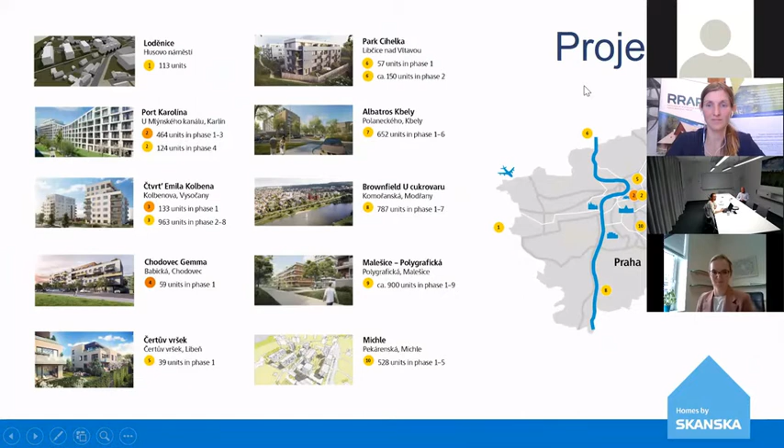But I will not go into detail for you because it's detail connected with Prague. But you can see maybe a little bit, you can get the feeling of the buildings on the left, how the buildings look.

So coming to the end of the introduction, and what is, I believe, important for this presentation, it's our values. It's also explaining why we are doing such a Greywater solution for flushing. It's because we care for life, and we focus on the customer. In Czech Republic, water is quite an issue, especially in recent years, so we believe those solutions, saving water, are good for our customers and good for nature. So it's explaining the first and fourth value.

And after this short introduction, I will go to this project. Our presentation, or our speech, consists of a presentation of mine introducing the environmental agenda, so the water, why we work with water, and also sharing with you a very interesting survey for us that we had done last year.

After this, why we work with water, Petr will focus on project Botanica K and go into detail. At the end, as a third thing, we have prepared for you a video, about 6 minutes long, for you to make the visit, to see the system, to see the project in reality.

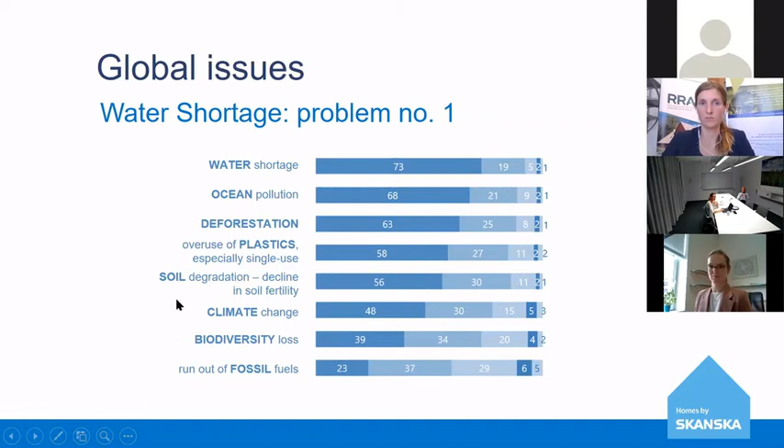We asked which environmental issues are important for them, and we can see that water shortage is about the most important. From the global perspective, water was the top issue, with climate somewhere quite below, along with biodiversity and other issues. When we asked about personal relevance, water remained first, but climate was second.

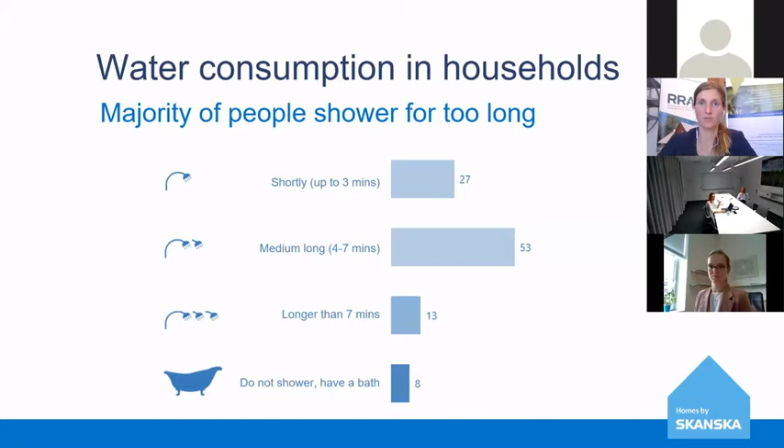We also asked people about their habits at home, just to give you a feeling about some detailed information - for example, how long a shower they take, because we realized that the water used for hygiene, for showering, is a very big amount. So we focus on decreasing the flow, the amount of water, and this is making a big impact on the consumed amount of water.

When we asked people what their motivation is to save water, because it's also important for us, we found that in the Czech Republic, money is still king - they want to save money, half of the people. But we can see it's also becoming a bigger issue that they want to solve environmental and global issues.

When we wanted to understand how we can help our clients save water, we asked them if they save water, and if not, what would motivate them. You can see that the largest amount of people would like to save water, but they don't know how. So you can see there is space for us, as developers, as investors, in how well we prepare the building, so that people can use it in a good way. We need to prepare it, explain it, and make it comfortable for people.

So we know if they want to save water, and we also asked again why they want to save water. We can see that in this survey happening last year, money and global issues are quite close. Petr will present a survey from 2015, when we gave the Botanica K project to the market, and the answers were different - you can see the change in mindset over 4 years, because we're dealing with this topic a lot. We work with the Ministry of Environment, we are changing legislation, and we do a lot of education, not only for clients but for all the public.

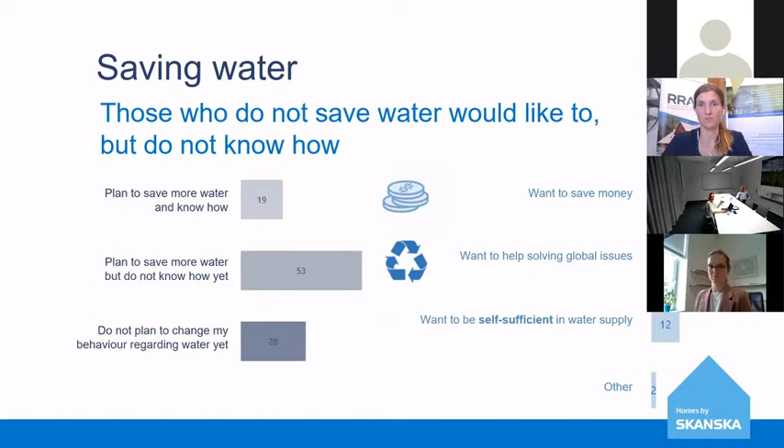You can see that 12% would like to be self-sufficient in how they save water. Dual flushing is the winner, but you can see in the middle that flushing with non-drinking water is becoming a topic - 12% of respondents could imagine using the system we are offering.

Coming close to the end of my part, it's important to understand household consumption so you understand why we focus on greywater flushing. Here you can see the cake figure showing consumption. Personal hygiene, together with showers, makes up the bigger portion, and we are aware of it. Of course we need to let people keep clean, but we can achieve that activity with a lower amount of water. So what we're doing is using less water, but you can see that water amount is 25%.

We are using drinking water quality, the highest quality of water, which is quite expensive, so we can use a lower quality of water instead. This part of the case was interesting for us, and we decided some years ago in this team - I'm happy to have Peter here with us, as he is the senior manager dealing with these topics.

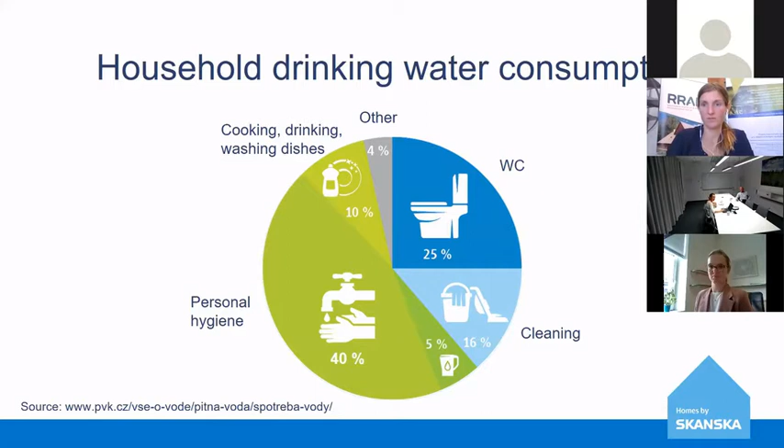So this is the motivation to understand the consumption. I have two last slides before I give the word to Peter. Now I'm moving from the motivation, from the Skanska reality, to the locality in Prague, in the district called Botanica, and its last phase called Botanica K.

What is special about this project? It's especially important for us that it was the first residential multi-story building in the Czech Republic flushing with greywater, and it's also the first residential building in the Czech Republic using the BREEAM sustainability certification.

This is helping us move towards higher sustainability of our projects, and it's third-party verification. Maybe you know LEED, maybe you know BREEAM, maybe you know some other local certification, but it's quite a challenge.

We have a lot of solutions that I will show in the next slide, but we also had a special focus on public spaces.

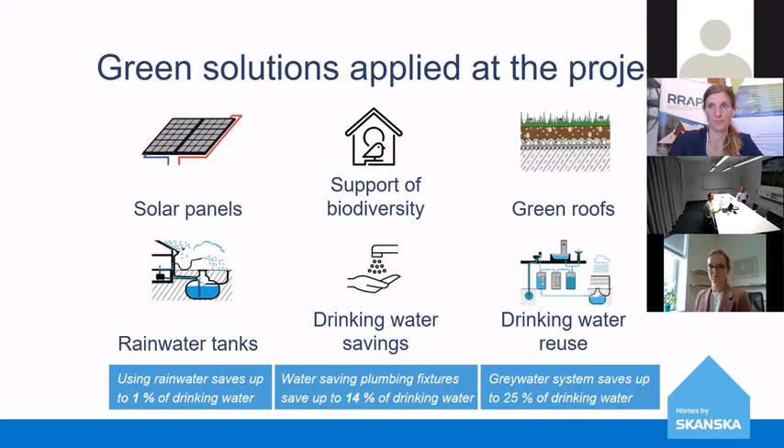My last slide is to inform you not only about the greywater solution, but you can see that we are also saving drinking water with low flow fixtures.

We are using rainwater tanks, underground tanks for watering the greenery, both public and private.

We are using green roofs - not all roofs are green, but let's say almost half, or a third. We support biodiversity, and we are preheating the hot water with solar panels.

We do a lot of small things, but let's focus on the picture in the lower right, showing how we are saving drinking water on the activity of flushing the toilet. I'm happy that Peter will take over.

Peter will explain and go much more into detail. Peter, please continue. Thank you, Eva.

I was more happy that you were talking - I could be quiet, it's fine.

Thank you very much for the introduction, and thank you all for having such an interest in our solution, in our projects, and in our country.

It's fine, my name is Peter. Excuse me, Peter, sorry, I cannot hear you very well - can you maybe go a little bit closer to the microphone? Peter, maybe if you can sit here. Let's try, please. Thank you for the feedback, now it's good, it's much better.

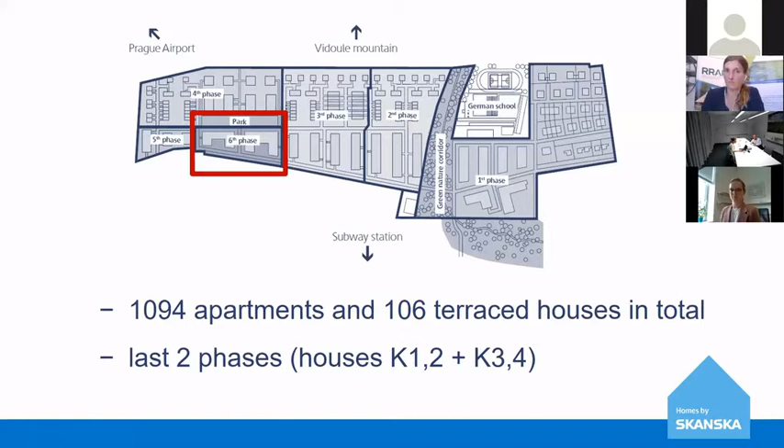In the red box - I wanted to say circle, red circle, I'm usually using circles - is the last phase, which originally should have been constructed as commercial buildings.

However, we turned it into residential development because of the demand in the area, and we started this development around 2009-10. At that time we decided that we should move higher in our sustainability solutions - this was the big original thinking that led us toward the greywater management system and so on.

Those buildings, as you can see, there are two houses - maybe in this picture it seems there are four, but actually it's just two towers that are one building. We can call them K12 and K34.

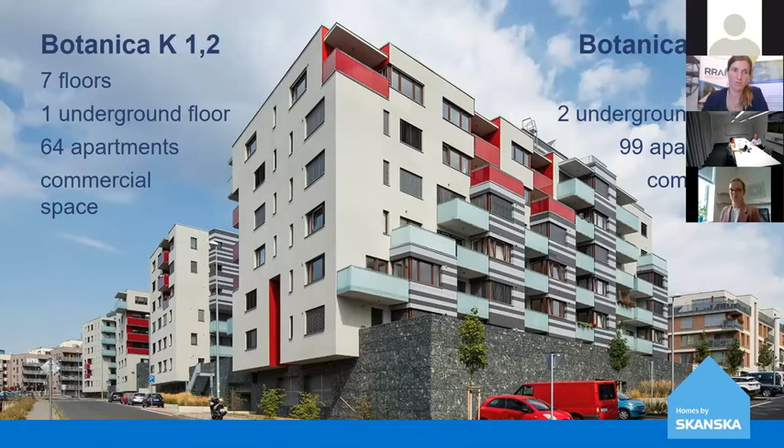The bigger one is K34. It has almost 100 apartments, 2 underground floors, 7 upper floors, and some commercial spaces, which are used for small shops. And the Botanica K1, which contains, both buildings contain the same system, and you will see the video from K1 too. It also has 7 floors, 1 underground floor, 64 apartments, and some commercial spaces. There is a small restaurant and grocery shop.

So once we started to think about it, the first thing we had to consider was the design phase. And Eva slightly mentioned that we started with a survey. The survey was somewhere around 2014, 15.

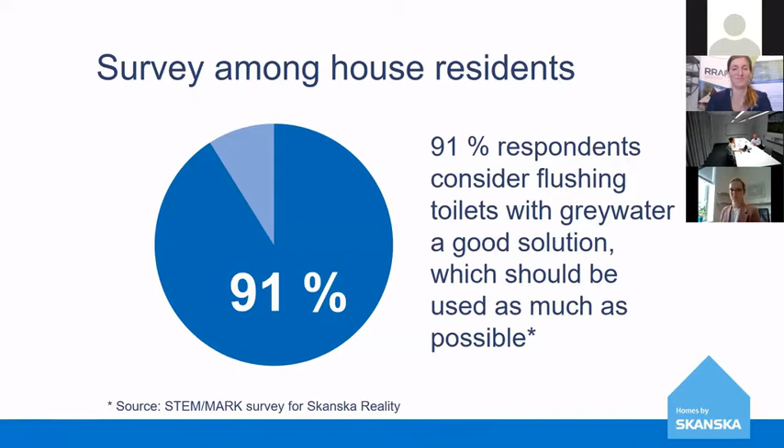90% of respondents considered that flushing toilet with greywater is quite a good solution. However, they probably didn't know all those aspects. Still, they considered it a very good solution.

Those same people also answered that the greywater could be used for car washing, watering flowers, house cleaning, and one brave person said he would be able to drink it, representing 1%, which is also possible. However, we are not so far.

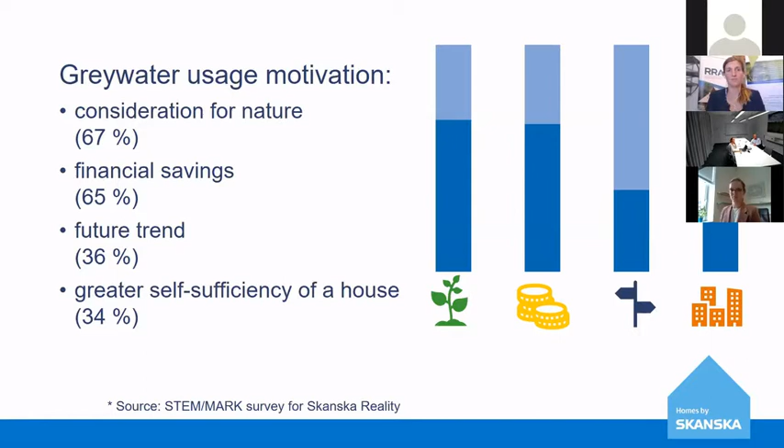So once we started to work with designers and experts, no one had any experience, because we were the first to try to use this system in complex residential buildings like this, and commercial buildings also didn't have any experience with that. There was no legislation, so we tried to pick up all the things that would be possible to find during this kind of development. We tried to calculate cost. We tried to identify possible issues, which was no legislation.

We tried to find some experienced engineers. Finally, we did - we found, I think, the right technical solution. You have to have double sewer lines, separate lines for greywater, a technical room that has to be very well placed in the building. We have to solve the connection to the sewer, including bypasses.

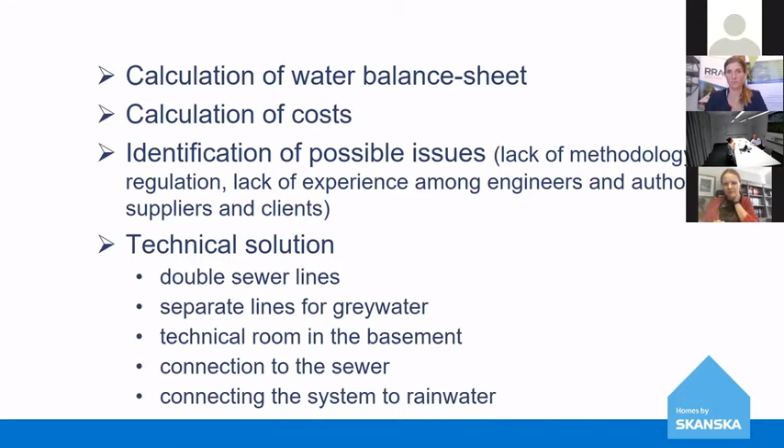And also at the beginning, we tried to connect the system also for the rainwater, because we didn't have any experience. I will talk more about that later on with the connection for the rainwater.

After that, once we did those technical drawings, we went into the process of permitting and realization. The permitting process was finally done. We had the building permit, so we put all that information about the system into the early stages of documentation. And during the realization, we did all the things that were formally planned, the two-line systems.

We also found a very good partner for the technology, like a cleaning technology supplier, which Mr. Petru is with us today. For them, it was also the first realization, and I think we had very good support from them during the installing of the system and monitoring and after-use of the system.

So we also did complex system tests during the realization before we handed over to clients. We invented some kind of measuring together with the hygiene station, with the authorities, etc.

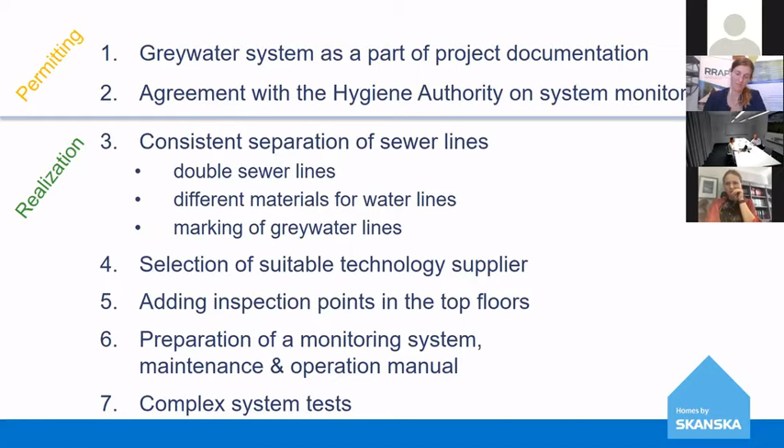It's not working, right? Okay.

And finally, we handed over to the clients, and we also did small things like this picture - what can you see on the screen? We put on the wall in the first basement of the building, just to remind the people that they have this extraordinary system in the building, just for them to enjoy the exclusivity of the building, just to know.

And we also put some kind of educational systems into the building, a screen where they can see the consumption of the greywater and drinking water. It will be on the video as well, so you will see the screen, you will see also this drawing, so we will come back to it.

Before we hand it over to the clients, we try to educate them. We created special documentation for them on how to behave in the building because of this kind of system. We put small signs on the toilets saying it's non-drinking water, and such small things were very good for education. We also properly monitored the system, not only for quantity but also quality, working with our chemical university colleagues who helped us optimize the system during use. Based on that data, we held several conferences to educate hygiene and technical people, and we pushed towards legislation, because at that time there was no legislation for this in our country, so we were quite a pioneer system.

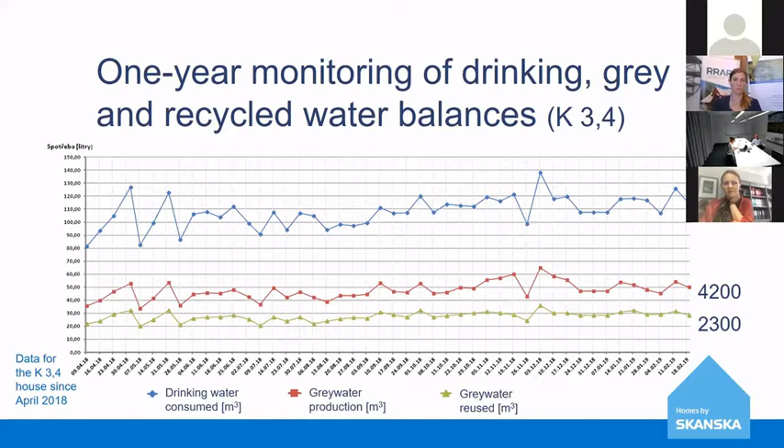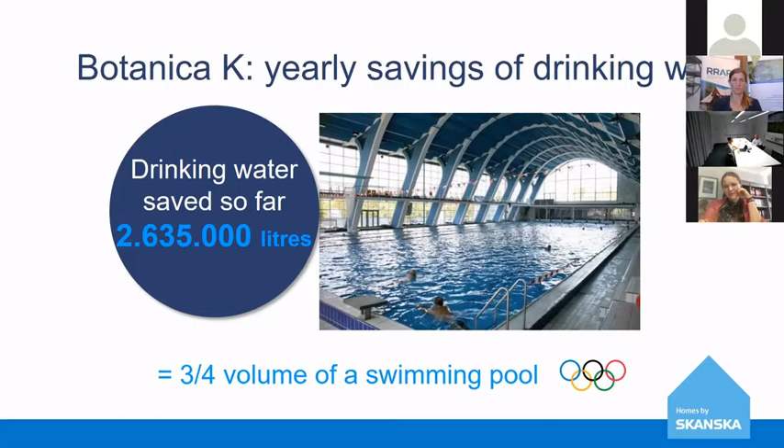This picture is probably our Olympic swimming pool in Prague. I show this often because it's important for people to understand how much, or how many liters, are saved. These are old numbers from 2018 or 2019, and currently we are at 5 - more than 5 million liters of drinking water saved in 2 buildings, which equals 2 of those Olympic swimming stadiums, as you can see in the picture. That's an incredible number. Within 3 years, we saved the equivalent of 2 swimming pools of drinking water.

And that's one part. If we add all those small savings, as Eva explained before - like plumbing, dual-flushing toilets combining 2 and 4 liters for flushing, and also rainwater usage - we are saving 40%, which is also proved by measuring. It's not some commercial number, it's proved by measuring.

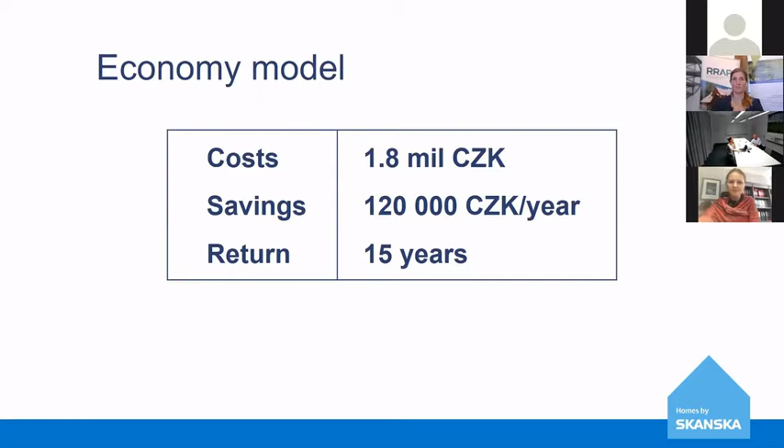People also ask about costing and payback. What you can see here is a very rough number, I would say conservative, because it also depends on how the building behaves. For your imagination, it's somewhere between 10 and 15 years. If the behavior is as good as possible, it could be 10 to 12 years. If the model is conservative, it's 15 years. However, I always show this with the comment that money shouldn't be the driver for this - sustainability is more important.

And the last summary: the system has been very stable and functional for 3 years without any technical problems. We are preparing new projects, and now we are also thinking about using other areas, because we have enough water for uses like cleaning and washing machines. That's our next plan.

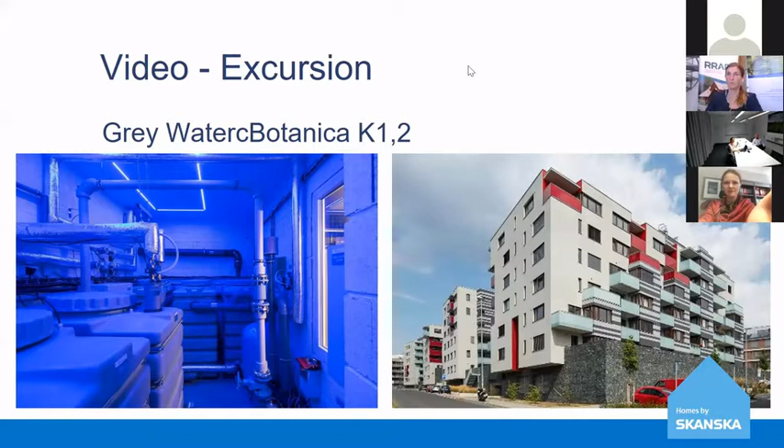Lucia, please, when the video starts, tell me if you can hear us. Yes, no problem. I think it's good, can you see the new screen now? Yes, we can see it. I will play it just shortly. We can see it, but maybe you can make it a little louder. Loud it, okay, yeah, because it was really quiet. Then I will shout at you from the video. So let's start it again. Thank you.

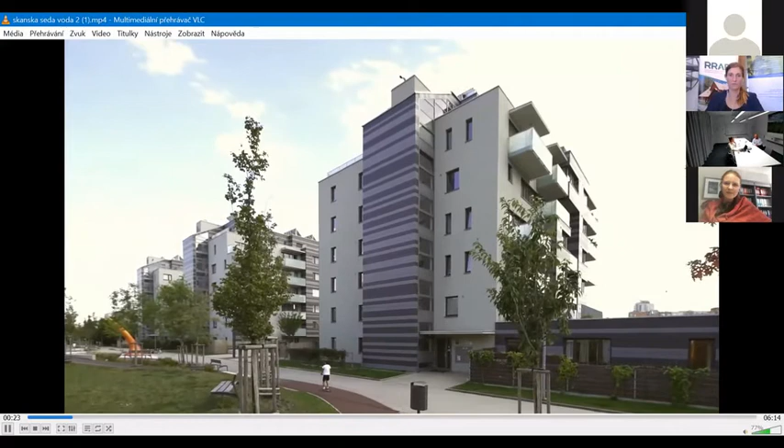The technology of greywater management is hidden in the basement of the house, unseen by its inhabitants and visitors. To draw their attention and make them aware of this unique technology, we decided to leave several marks throughout the house - for example, this graffiti or specific stickers in each bathroom.

We are in the basement of the house, just in front of the technical room. To give a better idea of what is inside, there is a window and the whole room is lit with blue light. The light does not have any specific purpose, but let's face it, it does look quite high-tech, doesn't it?

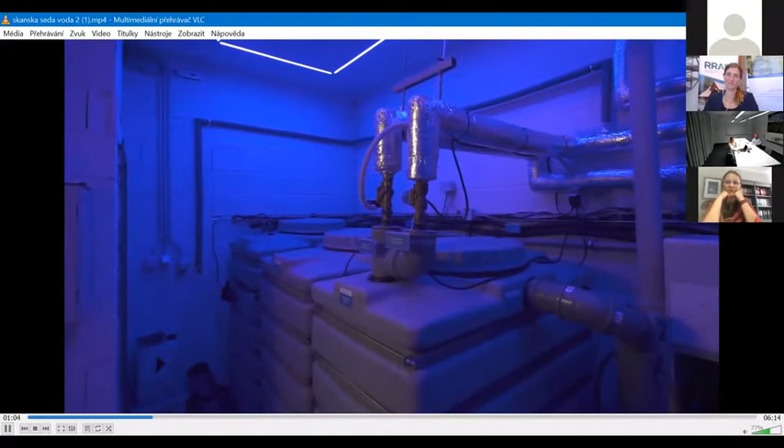As you can see, the room is quite small. It is used very effectively, so it does not take up too much space, which is also possible thanks to the fact that the technology, which I am now going to introduce, is quite compact.

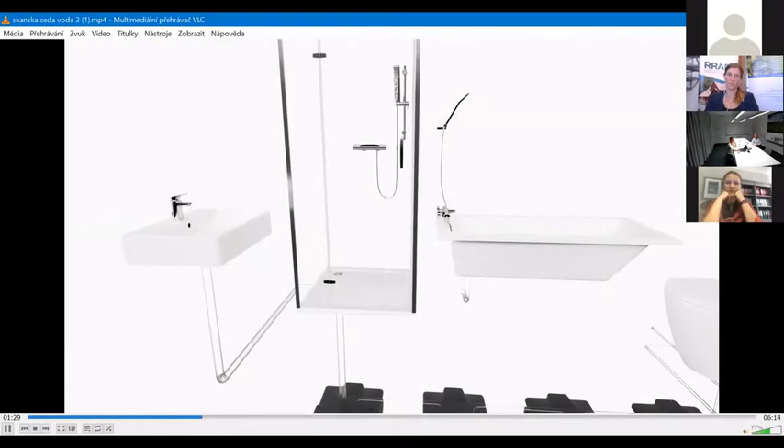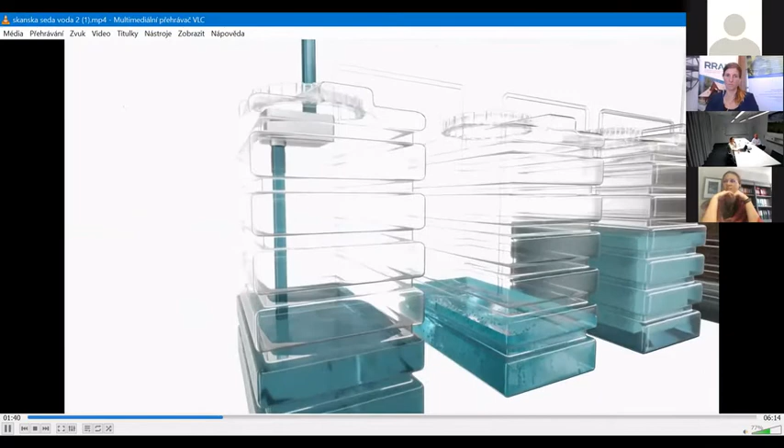The greywater recycling system is configured for the treatment of greywater - that means low-polluted wastewater from personal hygiene, shower, bathtub, and wash basin. There are three types of tanks. The first type is the greywater storage tank, where wastewater from households flows. Here you can see the first phase of filtration that removes dirt such as hair, fiber, and anything that people drop in their wash basins and bathtubs.

From the storage tank, the wastewater is pumped to the biological reactor, where the membrane module is installed. The last tank stores the clean, so-called white water. It stores the volume of water necessary for one day's consumption of the house before it is pumped back to the apartments.

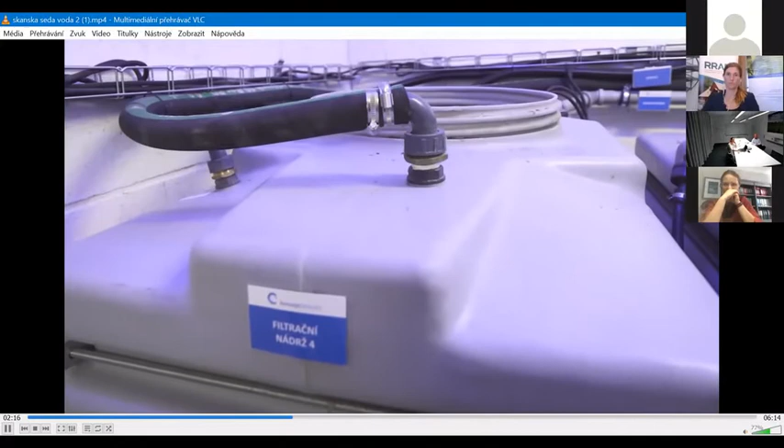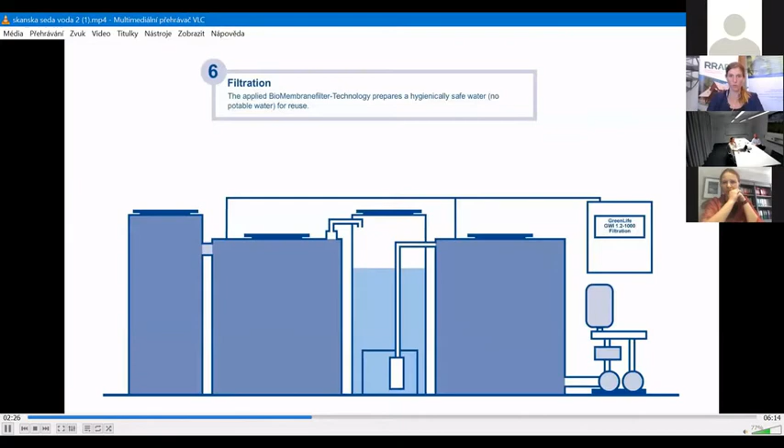The cleaning process consists of multiple levels. Elementary filtration takes place in the first tank. The second tank type ensures the main cleaning process, such as the biomembrane reactor and blowers for water aeration. The applied filter technology assures the complete separation of biomass from the cleaned water. The clear water is free from solids, bacteria, and germs.

The total recycling process is composed of biological treatment and ultrafiltration. The result is clear, service, non-potable water, convenient for reuse in toilets, cleaning purposes, garden irrigation, and industrial applications. In this building, we use it for toilet flushing only.

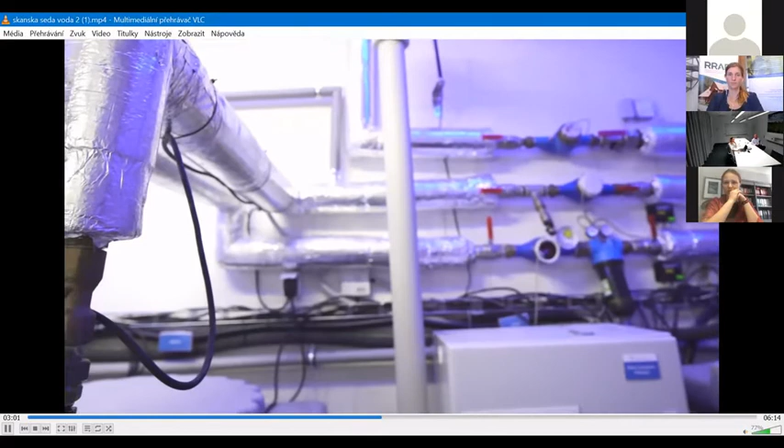When designing the first building with greywater, we needed to be sure that the system would function well in any case. The system is therefore backed up by a rainwater tank, collecting water from the roofs. As a second backup, the system is also connected to standard drinking water pipes in case the rainwater tank is empty. However, by measuring the water level during operation of the house, we have confirmed our assumption that the greywater produced by the inhabitants is double the volume needed for flushing toilets.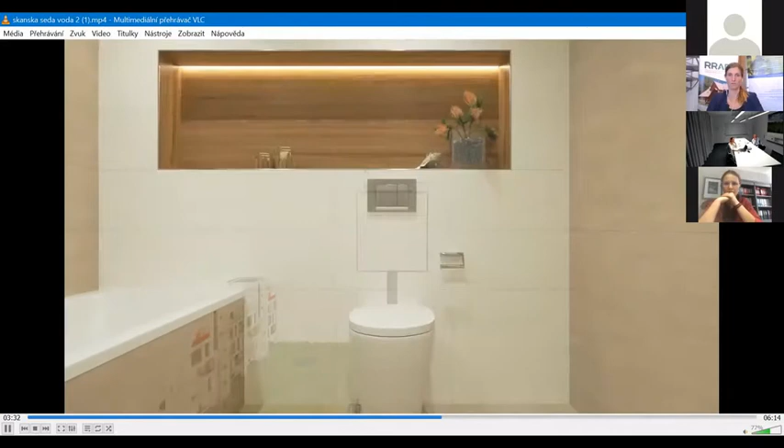The greywater produced by the inhabitants is double the volume of water needed for flushing toilets. Therefore, we do not consider the rainwater backup for future projects - it is unnecessary and only makes the system more expensive.

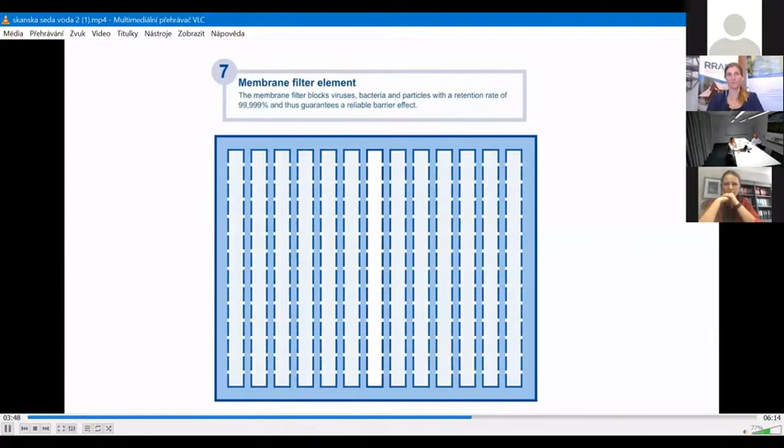The technology producer guarantees cleaning effectiveness with a blocking rate of 99.999%. Any health risks are therefore minimal.

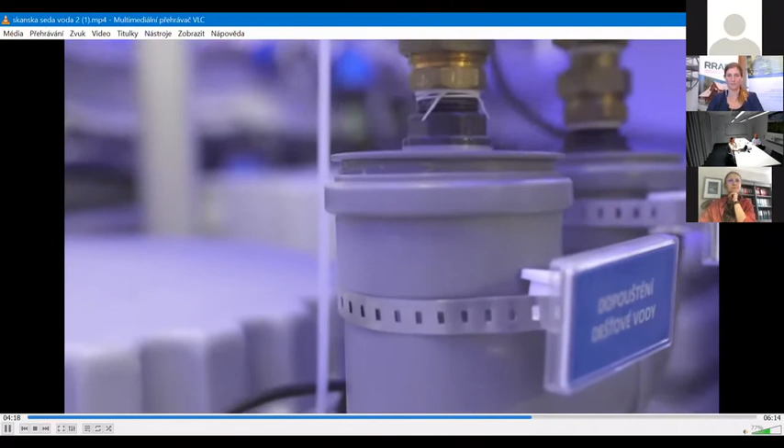In a standard system, a UV lamp is installed for disinfection. We decided for disinfection with sodium hypochlorite, which is commonly used also during drinking water treatment. Such disinfection prevents secondary contamination in the pipes. It also ensures that the aerosol made by toilet washing is 100% harmless.

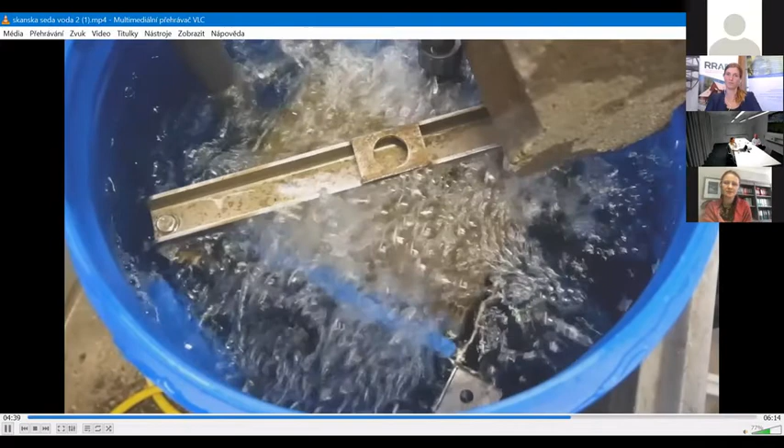The maintenance requirements are extremely low. Once a year, the operation of system components should be inspected and the membrane simply washed. The membrane filter can treat greywater for many years and still supply clean, hygienic service water. Trained local staff performs weekly checks of the system and its operation, and the sodium hypochlorite is added regularly.

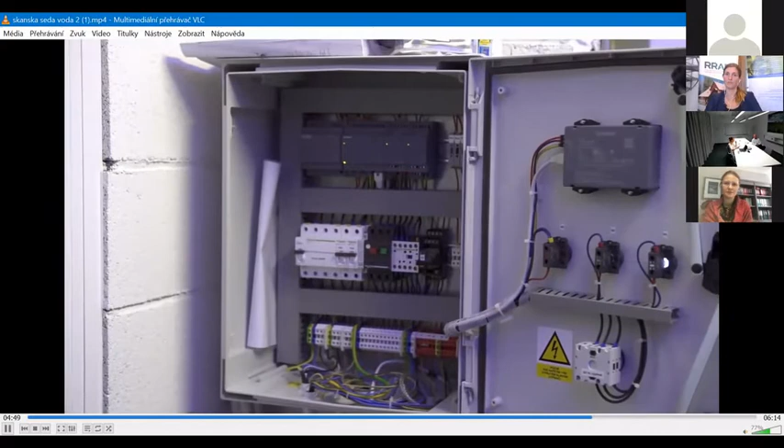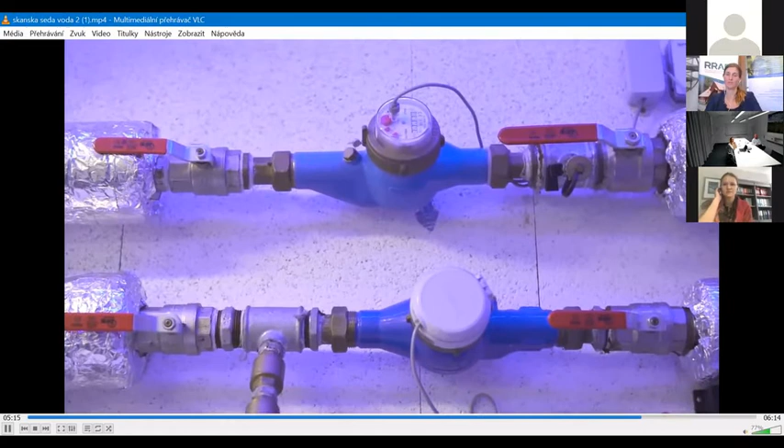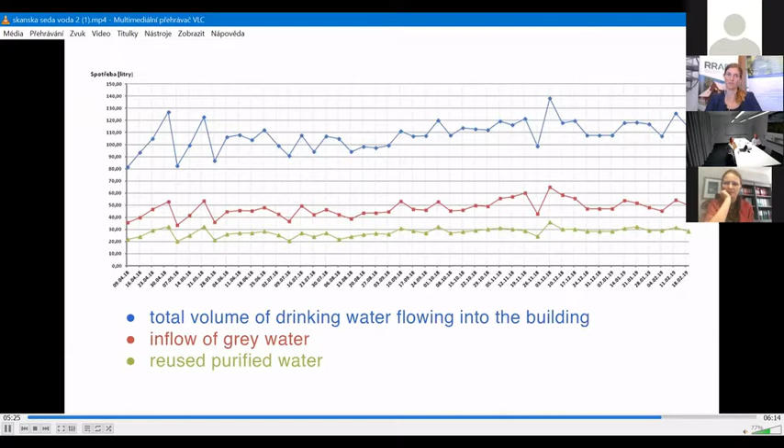To evaluate the system functioning, we have set two types of measuring: quality and quantity. While we monitor the water volumes constantly, water quality is monitored on a monthly basis. Samples are taken and evaluated by an accredited laboratory. Especially measuring the water volumes is important and interesting, as there is a lack of such data for the residential segment. We monitor the total volume of drinking water flowing into the building, as well as the inflow of greywater, the overflow of unused greywater, and purified service water.

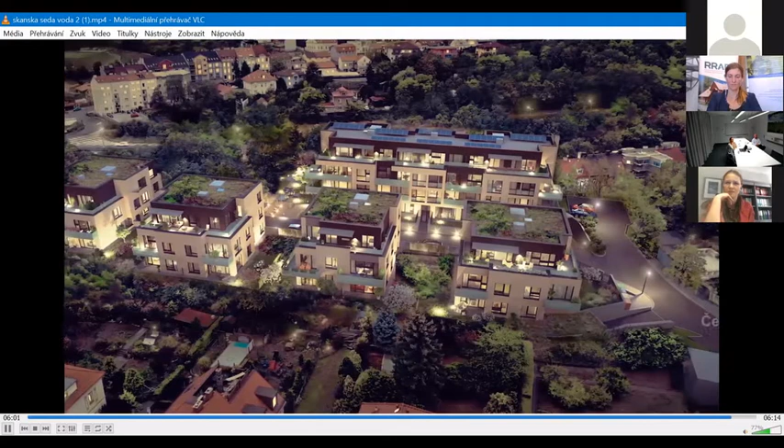Information from the measurements is important not only for us and our future development. We believe it is also important to inform people living in the buildings on how much water they have reused and therefore saved. For this reason, we have installed displays in the hallway presenting the volumes of used drinking, grey, and rain water. We believe water-saving solutions make sense, and we are already building a new project with a greywater management system. I hope you have enjoyed today's visit and it has been inspiring for you.

Okay. Oh, not again. Not again. So this was it from us.

Of course, we can go into detail, but what we try to share with you first is motivation, to give you context on why water is important in the Czech Republic. Because we only have the water that comes from the heavens. We don't have rivers coming into the country, we only have water flowing out. So within the climate context, water is becoming more and more important.

So we not only care for life and care for nature, as I said, the first value of Skanska, but we also care for the client. And we can see that clients are more and more interested in water solutions.

So we tried to show you the project, Botanica K. It means two buildings with four towers. We had a look through the video at the smaller one, Botanica K 1.2, and we tried to explain to you the basic principles of the cleaning.

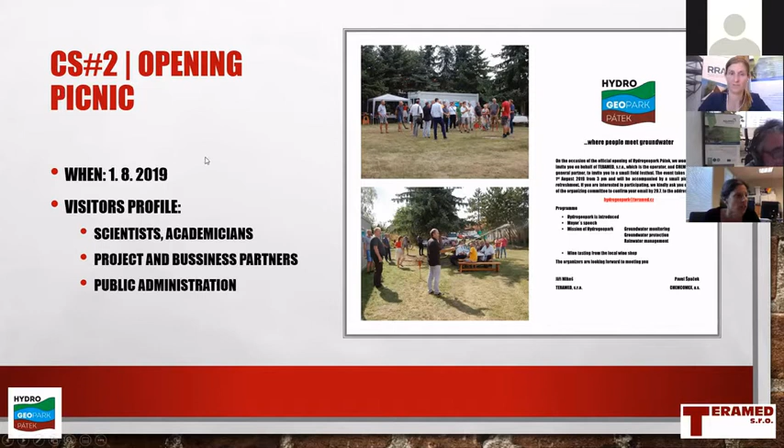Then we had the opening picnic, marking more than a year from the official start of our Hydrogeopark meetings and events. The visitors there were scientists and academicians, and also project and business partners, and also people from public administration. It was also connected with some practical showings of the activities.

Then we were included in an excursion - we were part of a conference which was in a nearby city, Poděbrady. So there were conference participants, and at the conference there were all the topics which are connected also to our site. So it was about wastewater treatment, about specific pollutants, also rainwater treatment, and so on.

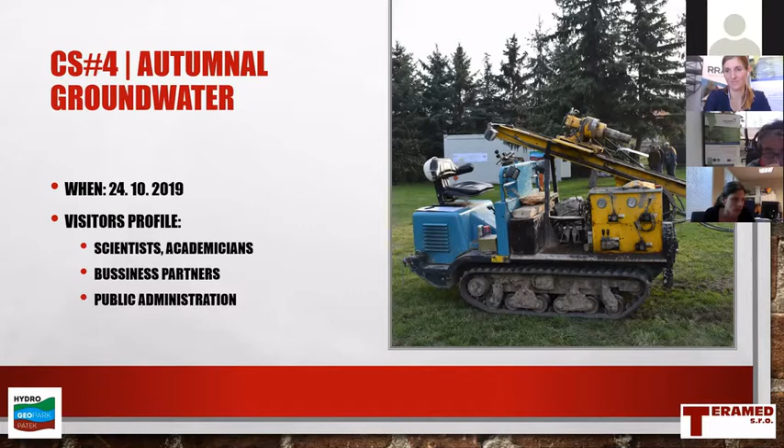And then we had big plans for this year, especially with basic schools or maybe more grammar schools and secondary schools. We had already planned a few excursions for the spring, but it couldn't happen for obvious reasons. So we organized the first meeting in June, called Restart, and we met there with our potential partners for cooperative research and also for education programs.

Then the last event was Groundwater Teaches, which was like a seminar or conference, but it was cancelled again due to COVID. It was supposed to be for representatives from all school stages, and also regional development agencies, public administration, and environmental education.

So in conclusion, I would like to invite you to our site one day, to really be presented. And we are open to your further interest and spreading the idea of Hydrogeopark to any other potential subjects or people. And now I would like to ask my colleague to tell you something more about the site. Thank you.

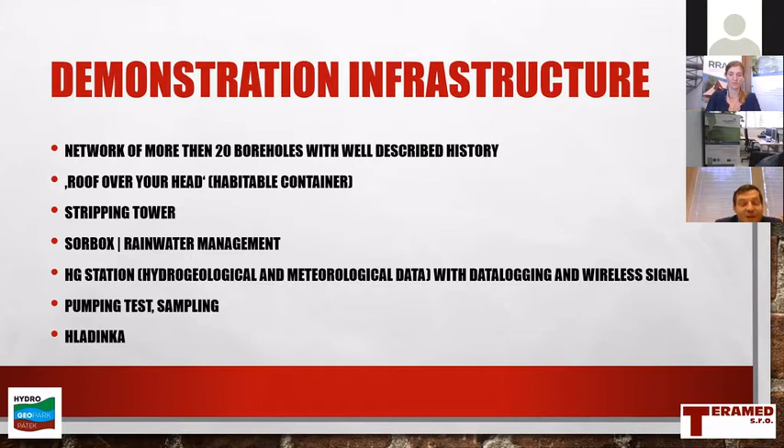This is the project Hladinka, which means in English 'water level'. This is an example of research activities which can end as an application process or application tool, in this case for representatives of municipalities, because they can observe and collect data.

About the water level in the groundwater, which is associated with the municipality. Okay, roof over your head - this is the habitable container. Unfortunately I don't have the interior views, but in the video you can see it. Then the network of 20 or more than 20 boreholes.

In principle, it is very similar to a typical well, the wells you find in villages. People have it in gardens, and it serves for the production of groundwater.

So this is the situation of the Hydrogeopark in the context of the village of Pátek. You can see this ST, which means wells, these typical wells. The owners are the people who own the properties here in the village.

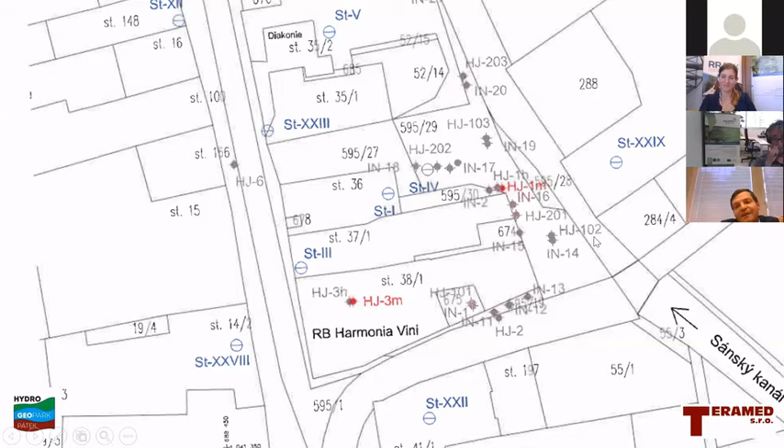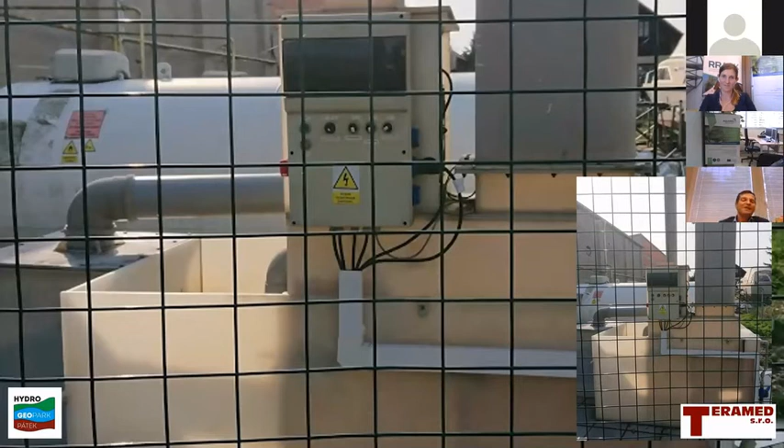This is the building of the mill, and this is the Sánský channel, which is the surface source of water. So, the stripping tower - this is heritage, also heritage from the remediation time. This is special equipment for the on-site cleaning of contaminated groundwater.

The principle is to break the contaminated water mass into small droplets, which are contacted with the surface of active carbon, a sorbent. This contact leads to the elimination of organic contamination from the water, and you get cleaner water than at the beginning, and you can soak it into the subsurface.

This is a very important tool, which was responsible for the situation that nowadays groundwater on this site is relatively free of contamination. The big picture shows the detail of the electric, operational panels, and in the right part of this view you see the tower where contact with the active material is done in this system.

Sorbox - this was the Chemcomex research project, and the solution is based on the fact that rainwater is contaminated by many anthropogenic contaminants. This means organics, but also, and this is very important, metal particles - copper, zinc - and the reason is that many parts of buildings are made from these materials.

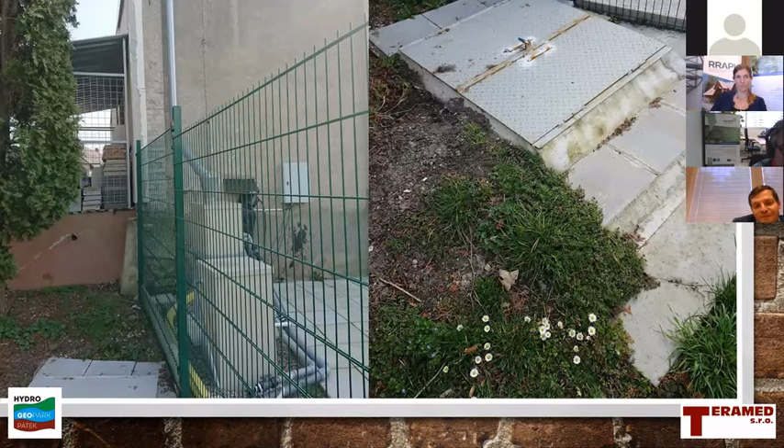Some other pictures - a functional demonstration. The separator and absorption part should serve for 6 or probably more years, up until the time where the absorption capacity is fulfilled. And on the right part, you can see the closed infiltration object.

So this is the detail on the infiltration elements, and it serves to demonstrate how to deal with rainwater correctly. Nowadays, as our colleagues mentioned in the presentation about buildings, it's important to complete many approaches and be more environmentally responsible. This means dealing with water better, with the best technologies and ways to improve groundwater restoration, the usage of process water, grey water problems, and so on, but this is not part of my presentation.

HG station, the hydrogeological station, was an output of cooperation with the Czech Technical University. This is a special device which allows wireless transfer of data. Now we have a new location for this, which is principally the brain of the HGP Hydrogeopark. Here you can see a borehole equipped with special sensors, and we can measure groundwater level, temperature, pH, conductivity, and all these data.

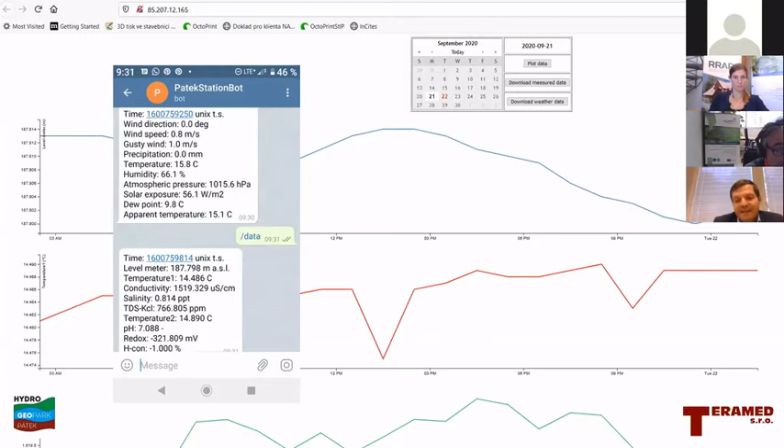We get this data from the borehole via a mobile application, Telegram. We can get information about the groundwater parameters and also about the meteorological situation. On a computer, you can get time series of these parameters - groundwater level, temperature, pH, and so on. We can collect it and also get information from our meteorological station. What's very nice is that at night you can see the meteorological station lit up in different colors - it was surprising for me. One time I visited this space and didn't know the meteorological station had these special effects.

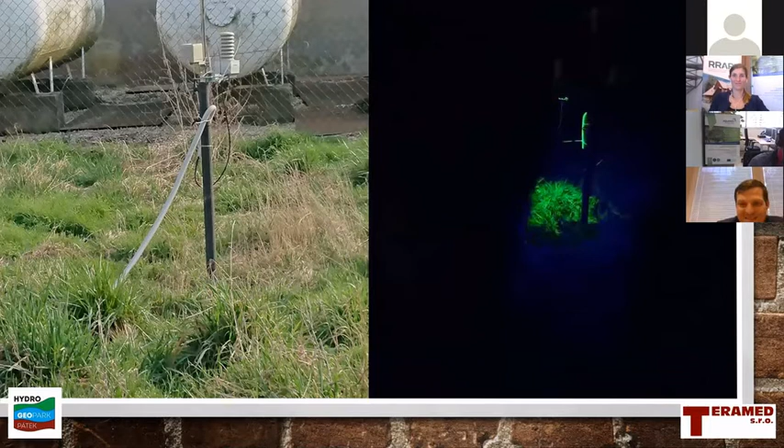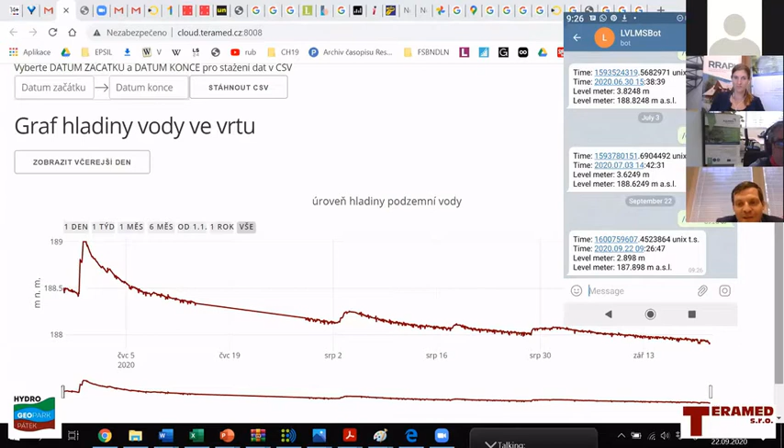Now about the Hladinka project, which is a solution tailor-made for representatives of municipalities who want to be responsible and get data about groundwater. The solution is very easy: you create a public or municipal borehole equipped with a sensor for water level parameters, and in a box on a wall there is also a system for data transfer. The mayor can get information on their mobile phone about the water level meters, and on a computer, in the data logging system, you collect the data. This serves representatives of municipalities as evidence about the situation, and they can combine it with the meteorological situation.

The last large part is about research projects - our acronyms: Train, Trap, Project H, SWICAS. I will describe these. Not all of these are only our projects; in some, we were the provider, or Teramed was the provider of special services, special analytical works, and also microbiological analysis. I will describe this in the next parts of my presentation.

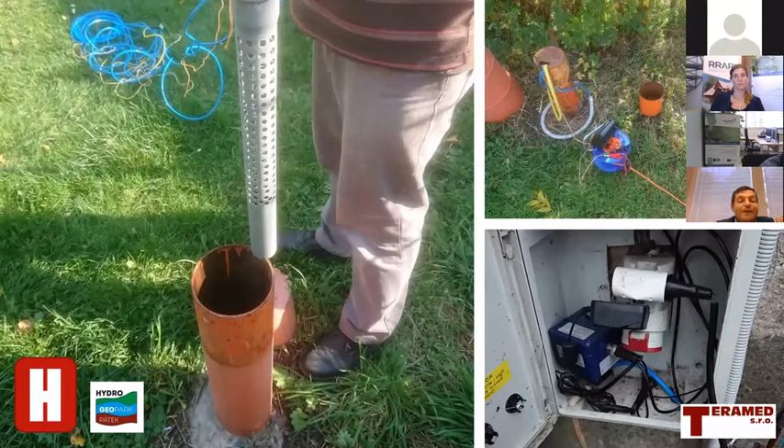Project H was very important. This was a Chemcomex project, but Teramed was involved in the microbiological part. It was based on the fact that hydrogen dissolved in groundwater may accelerate the transformation of CHC, chlorinated hydrocarbons, into non-toxic or less toxic compounds in the environment. There are alternative technologies - whey, a secondary product from dairies, from milk, may be used as a substrate metabolized by bacteria, leading to the production of dissolved hydrogen, which is important for bacteria responsible for transforming chlorinated contamination in the groundwater system. With our partners from the Institute of Macromolecular Chemistry, we created a so-called membrane contactor, which enabled the dissolution of hydrogen into the groundwater.

I have to mention that what was really important was safety first. This was a special mixture of nitrogen and hydrogen - it was not explosive. This remediation gas was the agent for the acceleration.

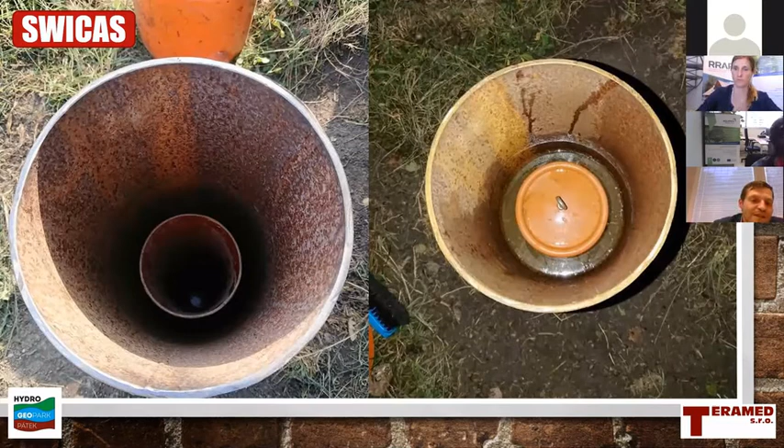In the left part, you can see a borehole equipped with this special sealing, SWICAS sealing, and this was for testing in the operational area, how to use it. This is an example from the Chemcomex project, of how to increase the technical state in a relatively conservative field as hydrogeology is.

Reduce. This was our project based on monitoring. We are very proud because our partner was Biofarm company, which is the leader in the field of animal medicaments development.

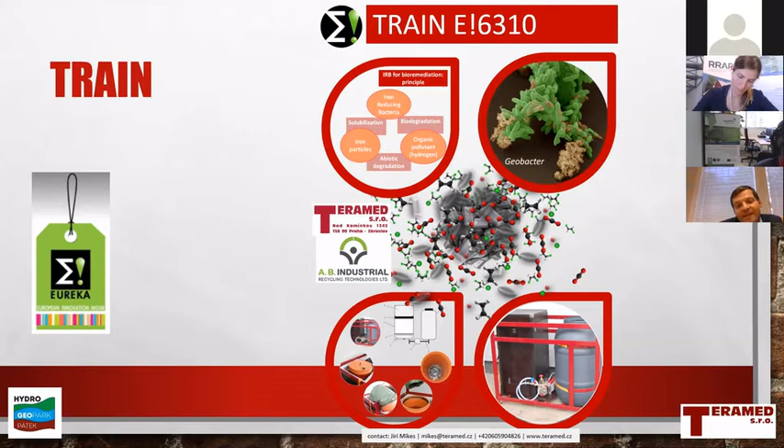So this project had a lab step, then testing, creating some special application system where the suspension was created, and I'll try to show you on the next slide the basic principle of this technology. What is important, this was financed by the Eureka program.

And we used the possibility to cooperate with a foreign partner. Why the question of 'train'? Because it's very popular in remediation projects to use so-called train technologies - a combination, for instance, of chemical methods, physical methods, and biological methods. In this case, this is a typical example of the combination of chemical approach and biological approach.

Finally, you can use the power of microorganisms and also the power of iron-2, the reduced form of iron, which serves as an accelerator of the transformation. On the right part, you can see the working vessel where the suspension of iron is created, and the black box, which is an anaerobic reactor with a special pumping system where we create the agent for remediation.

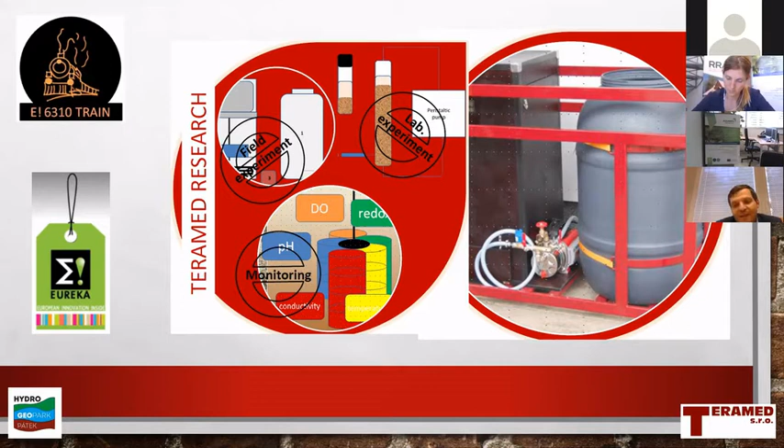And now I have something interactive. So these are iron-reducing bacteria, which are everywhere the concentration of iron in groundwater or in the subsurface is higher than normal.

You use iron-2, ferrous ions, and these bacteria create hydrated iron oxides. This material serves as a carrier for the biomass of these bacteria. They can reproduce, increase their biomass, create the planktonic form, and we can get a special agent for application in the subsurface.

Now I describe the situation. These bacteria are responsible for dissolving these hydrated iron oxides, and they create ferrous ions again. This is the same situation as the wreck vessel of the Titanic on the seabed. The fact that in coming years no Titanic will remain is because of iron-reducing bacteria, since they accelerate the dissolving of iron.

But in the case of the TRAIN project, it was very important because the iron-2 ions are oxidized by oxygen in water, and they create iron-3 again. When these particles contact the contamination, typically DCE, dichloroethene, the iron ions accelerate the transformation, and the iron-reducing bacteria use this contamination as a source of carbon and energy. The final products were chloride, which is in small concentration without negative impacts on the environment, and carbon dioxide, which is a soda stream product and also without negative impacts on the environment.

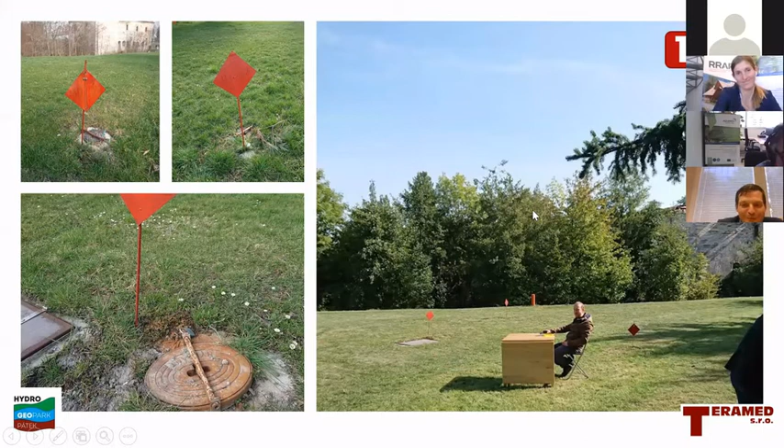In the right picture, this is my colleague Vojta Pilný. You can see the field office, but I use this picture to demonstrate this special borehole line. Hydrogeopark is really a field workplace, and I think when the weather is good, the office may be located in the field. On the left side, you can see details of boreholes which serve for the tracer testing.

So the last part of my presentation is models of cooperation. I think what you can see in my presentation are individual research projects. This is the situation - we partner with academies, with other companies, and we try to solve hydrogeological projects, but also some interdisciplinary projects.

The second model, which was described by my colleague, is the education event tailor-made for a particular target group. There is also a third possibility - Hydrogeopark may be rented with special services, for instance sampling, or in some special cases we can create a new borehole. But what is very important to say is that all these field activities have to be environmentally very responsible, because we cannot test some dangerous ways to decrease contamination.